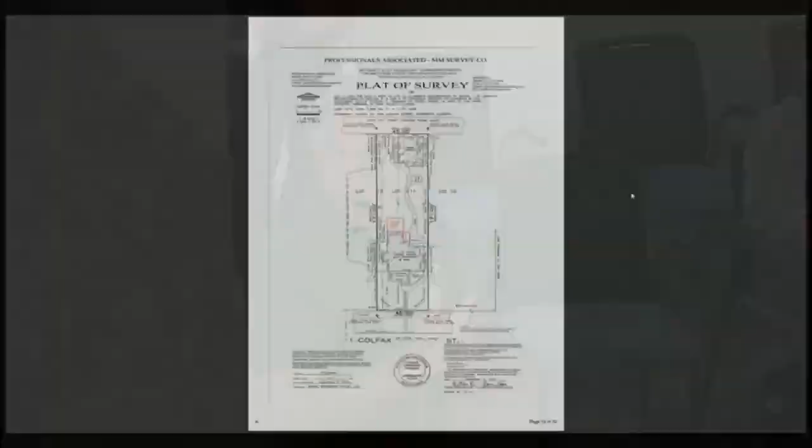Basically, what we're going to end up doing is just add a deck off the back with the screened-in porch, following the same roof line as the existing building itself. And of course, it's not a historic home, but it's a historic district. So there's also some views from different photos we gave to Cade looking into the backyard.

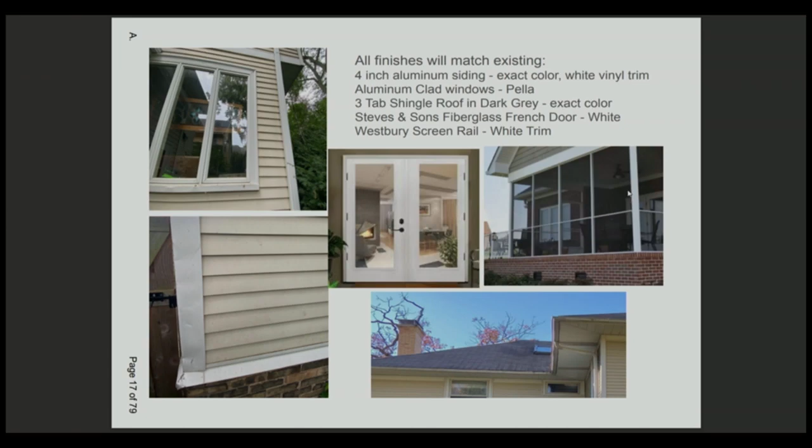But basically, add some examples of what would actually be put in place. We're matching windows, matching siding, etc. Obviously, the architectural plans show how the actual deck and screened-in porch is coming off the back of the house.

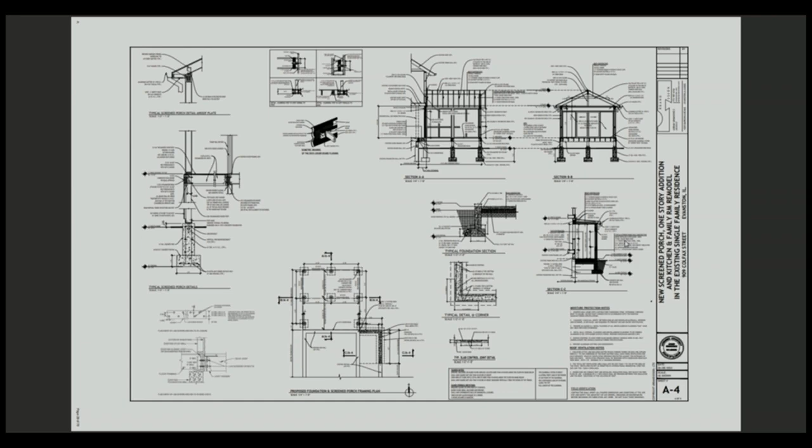Okay, and those are mechanicals. There's a 3D rendering of what it'll actually look like. So the mudroom is getting extended a little bit from current, a couple feet out, and then that's the screened-in porch that we would add onto the back of the house. Is that it? Pretty much.

Okay, thank you. So just for clarification, this building is considered historic because it's a contributor to a historic district. I have a question for you, so we're going to start with questions from commissioners. Could you please address some of the standards that you think are relevant?

Thank you. Well, actually, I probably don't have the exact list of standards, Cade. Is there any specific ones we should be addressing for this one?

So Kate's going to give you the review standards. Standards for construction, and maybe discuss the materials there. Sure, yeah, absolutely.

Well, first with the height, we were hoping some of the photos we had sent over would kind of show that you actually can't really see into this backyard from any direction—not from the front yard, not from the alley, not from the neighbors. There's too many trees involved. And obviously, we'd remove trees just to actually show the 3D rendering.

So as far as the height goes, the roof peak was sitting at about 17 feet tall. The first floor is about 3 feet above ground level, and then it's a standard 8-foot high for the screen around.

I actually went to take a look the other day. As you say, we can't take trees into consideration, but it wasn't very easy to see what was going on because of all the trees, and of course it's summer, so there's a lot of foliage there. The one concern I have is about the relationship to the property on the west.

It's a single-story mudroom, but it is raised, and as far as I can tell from the plans, it does overlook the neighbour's property. So in relation to standards 10 and 11, scale of a structure, particularly standard 10.

This is the standard for review of construction, numbers 10 and 11. In terms of number 10, can you comment on the relationship of the building to the adjacent property to the west?

Absolutely. So, if you were to take it into consideration, their current sight line, their current windows look directly in the same direction that you're talking about. As you come off the back of this building, you are going to be 3 feet up on a fence line, which is only 6 feet high, which is standard fence, of course.

So it should be pretty much on. Are you talking about the upper windows? Yeah, it might be some kind of illusion, but just like the two existing windows, it looks like the flashing is scooting underneath the sills, but in that drawing it's clear the sills are different heights. Oh, I see what you're saying. It does look like they're a little higher here than in the actual drawings. Good eye, yeah, absolutely.

Just for the record, what page are we looking at here? The rendering, page 30? Okay, thank you.

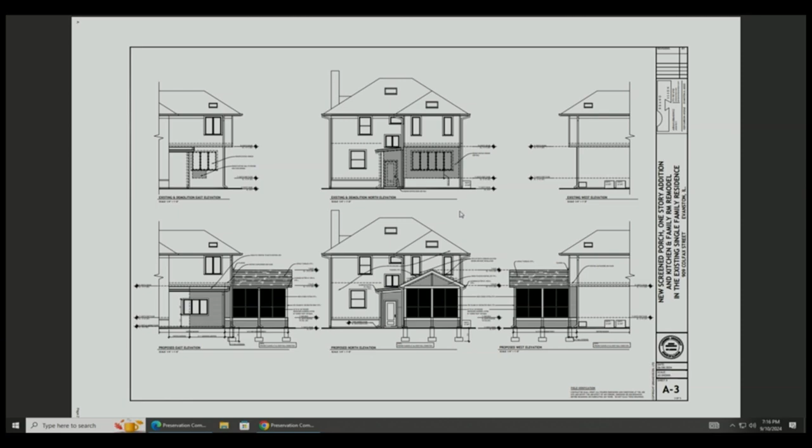Okay, other questions for the applicant? Okay, thank you. Was there anyone wishing to speak on this application? Okay, in that case we will move to deliberation.

I have a question for my fellow commissioners regarding the standard for review of construction number 3, proportion of openings.

I'm just wondering if anyone is concerned about how large those screen panels are versus all the small windows in the back of the house. I don't know whether that's something we need to be concerned about. That's how screen porches are, they need to have lots of screening, but their proportion is very different from everything else.

Go ahead, Stuart. Yeah, I think it's a funny comparison to make, because the windows are cutouts in a surface, whereas the porch is a series of posts with screening infilling between them. So those screen panels aren't really going to read visually as openings in a surface. The question of their proportion relative to a double-hung window in the rest of the house, for me at least, isn't a visual issue. So it doesn't read as relevant to proportion of openings for you guys. Yeah, that's fine with me.

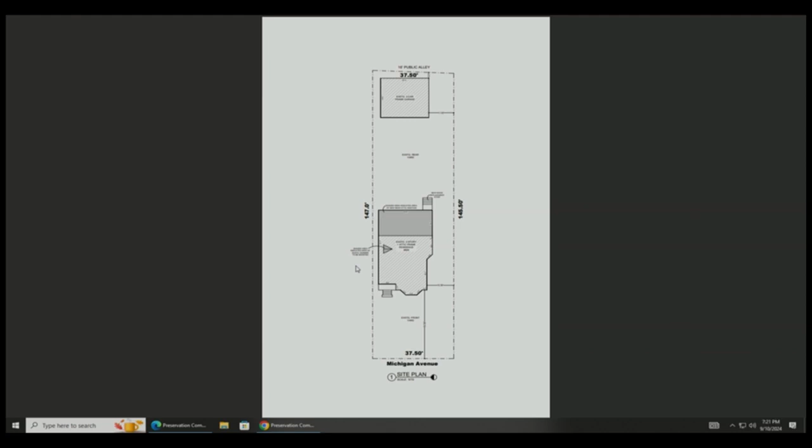As far as height is concerned, we are keeping the existing ridge line, so we're not going any higher than what's existing. We're using the exact same materials. Right now there's vinyl siding, vinyl siding trim, and asphalt shingle roof that we're going to be mimicking. We are going to mimic the same kind of windows—they have muntins that are 3 over 2 on each double hung window.

And then at the rear, it's a little sporadic. Not every window is consistent. This house has a lot of different roof lines, and had an addition off the south side at one point.

So we're at the rear elevation—I think it's the next slide over. Yes, so you can see the existing is on the left, and the proposed is on the right. We're proposing a very large window at the rear addition at the back, using the same windows and same shutters. So that's kind of how we came up with the volume and utilizing the space.

So it's technically an addition, but we're basically building on top of the existing footprint. We're not disturbing any landscaping or any trees, so that's a good thing. And in the end, we will have a nice primary suite for the owners with a bathroom, a closet, and a stair that's to code.

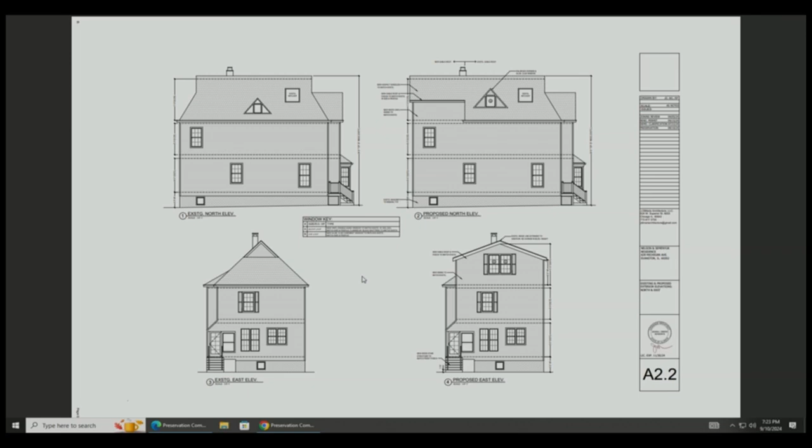And we hope that the front elevation from the street, especially the two dormers, will talk to each other a little bit better than they do now. The existing one is very tiny on that upper left-hand drawing, and the one on the south side will be the same proportion, so there's some continuity between that.

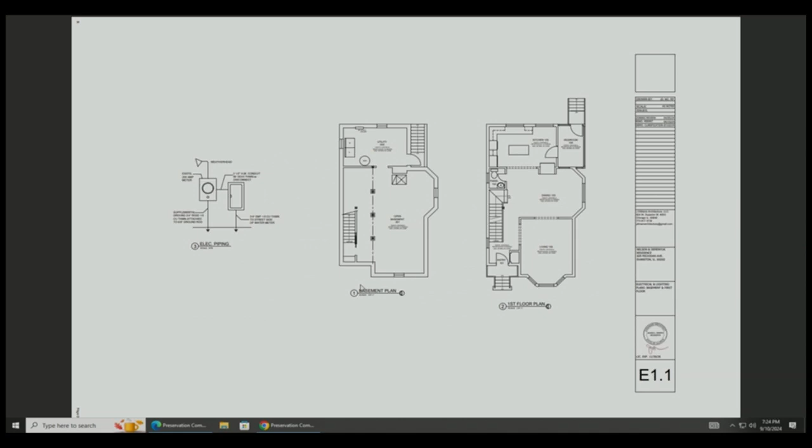We aren't removing any significant architectural details—all the eave lines and heights are going to match. Also, the next image—I don't know if you can go to that... actually the one prior to that, sorry, thanks. So we did, with our 3D program, try to see what we would see from the street, and it's not as visible from the street and the south side alley as it looks like in the elevations.

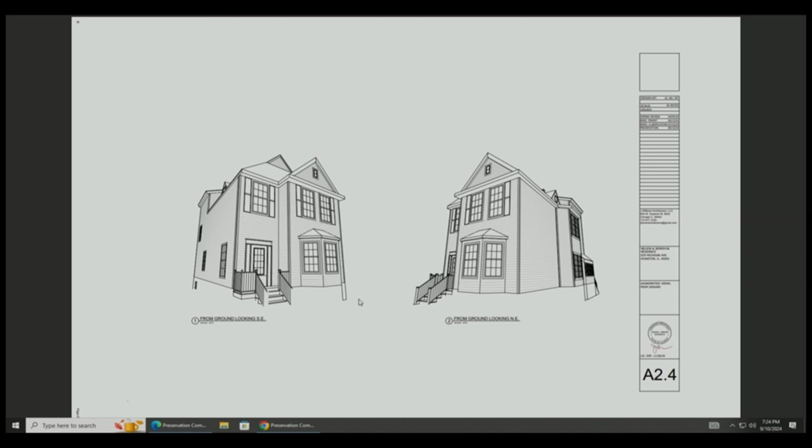The north neighbor is putting an addition off the back right now, and on the south side there's a big apartment building, so because of the zoning, we're R5, we have kind of a mix on that street. Also, the homeowners have two children and are growing their family, and the second floor has three bedrooms and an office, whereas being able to put the primary suite on the attic floor would be good for their property value and good for the longevity of them being able to live in the home for a long period of time.

Yeah, I realized that the addition you're doing is basically in the backyard and barely visible from the street, but all of the drawings you've made show it from the front or the side, and we just get a peek of the way the addition's roof comes together with the existing roof. I think it's a shame that you did not draw a volumetric drawing showing the thing from the back, because the roof pitches are very, very different, and I'm having trouble visualizing what the existing roof and that very shallow gable roof look like when they come together.

I think it might have been useful for you to make that drawing to see what that condition looks like. When we first submitted, we did those axonometric drawings—do you have those? The committee reviewed it and gave us this input. We also sent in a video that moved the volume around, which might be helpful. I don't know if you have access to that. Sorry to put you on the spot.

So while Kate is following up on that, were there any other questions?

Go ahead. Did you consider any other kinds of roof lines? I mean, obviously you're trying to maximize square footage up there, and I've had attics like this where you're like, what do we do with this space, we thought we could get more up there. But did you consider anything else, or was this it?

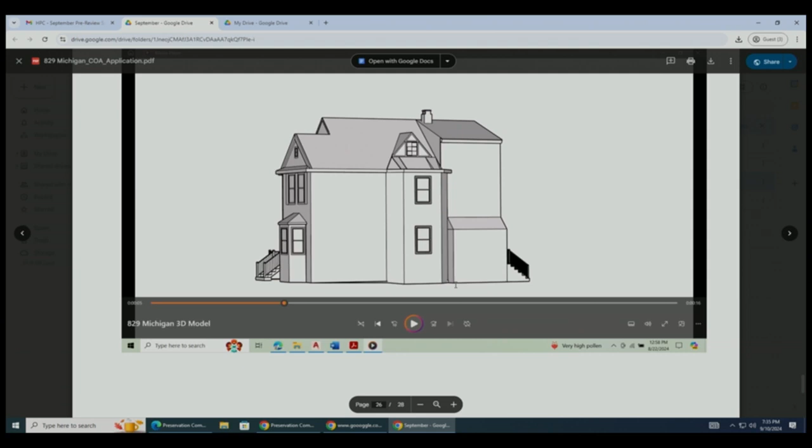I'm just curious, and maybe you answered this when Josh asked a similar question, but it seems to me that if you had shed dormers in the middle of the plan, I wouldn't have this concern with this kind of tower appearance at the back. Was it a concern for getting rid of existing dormers, or what was it?

Yeah, because the existing dormers, especially the one to the south, is really charming. It's basically a bay window that comes all the way up, and then there's a dormer on top of it. From the inside view of the bedroom, it's really a charming little nook. You really can't get in there, but it adds to the charm of the attic. So, yeah, in my estimation, it seemed that would be a much bigger ask to do that, and kind of a standard solution in a way.

That's our thought process. So I have a question, because this back addition, is this parallel to the 3-flat that's next to it? There's the porch, there's kind of a 3-story porch. Yes, that also has that large vertical element. Is that kind of in the same plane? Exactly, they're basically in the same plane, yes.

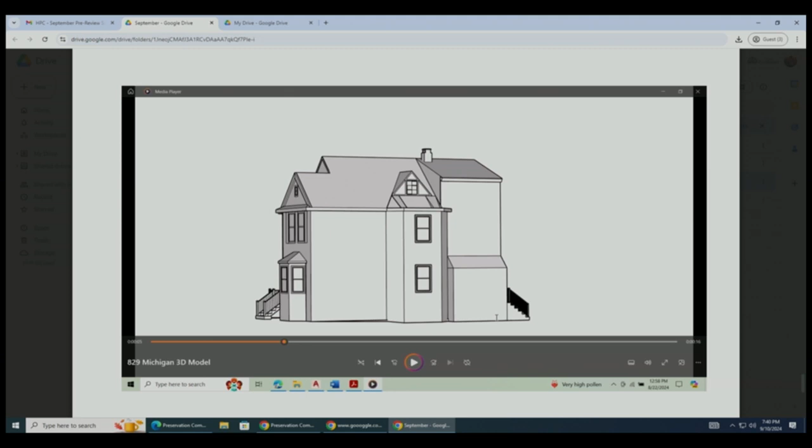The other possibility is, if you look at the front of the house, what you've got is a kind of echeloning situation where you have a lower gable coming forward, a higher gable, and I think for me the problematical thing is the back. Do you have a volumetric shot that shows it from the back?

Yeah, that one. I think the problematical thing is that, as Tom said, it reads as a tower, but it's really kind of stubby, and the pitch of the roof is so low compared to the rest of the house. I don't know whether the ridge line is at the maximum allowable or not, but it sure would be nice if you raised that ridge line and then had a lower gable in front, another gable, and yet another gable behind that.

From a construction point of view, I'm assuming the rafter ties are going where the head of the window is, and if you had a steeper roof there, which would allow you to set rafter ties at a third point, you'd pick up a little bit of ceiling height. You'd pick up, I think, a better relationship to the massing and the roof angles of the house by doing that. But again, I don't know whether the ridge for the house is maxed out in terms of what you're allowed.

I wanted to just, this is our deliberation, sorry. No, it's okay, if we have questions for you, we'll ask. I just wanted to say, this sounds really loud to me. Is it all of a sudden, right?

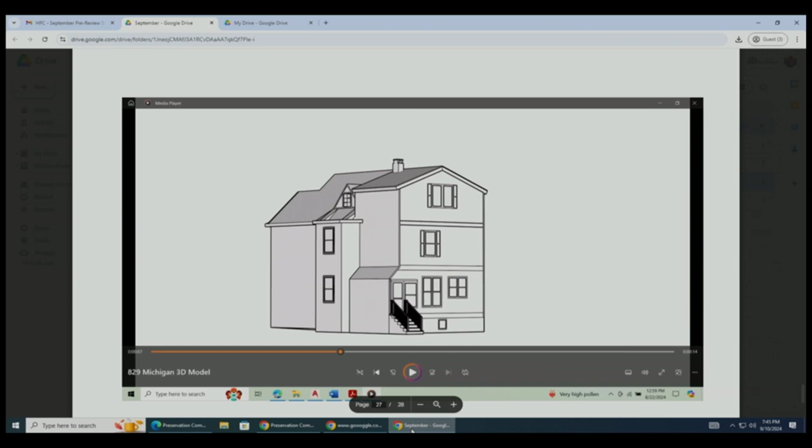I think, unless I'm misreading the drawings, I just want to clarify that I think these volumetric studies are a little simplified in terms of the pattern of fenestration compared to the elevation drawings. So what's the equivalent in our packet here? Because it looks like page 51. Is that what it's telling me? I can't read that far. 51, let's look — Sheet A2.1.

So those are the elevations. Oh, I see. Yeah, so there are windows there. There are 4 on the first floor and 1 on the second floor. Okay, so now I understand. The other was a more simplified axon, and what we have in our packet is more detailed. I think it was just there to help us get a sense of the massing from the back.

Other questions about applying the standards? Thomas, did you have a standard? Yeah, so I was — go ahead. This is kind of, I think, what Stuart and I channel as our intuition, which is just codified, so almost every time we can find a rule that's behind it. The one I probably should have started with was the proportion of facades.

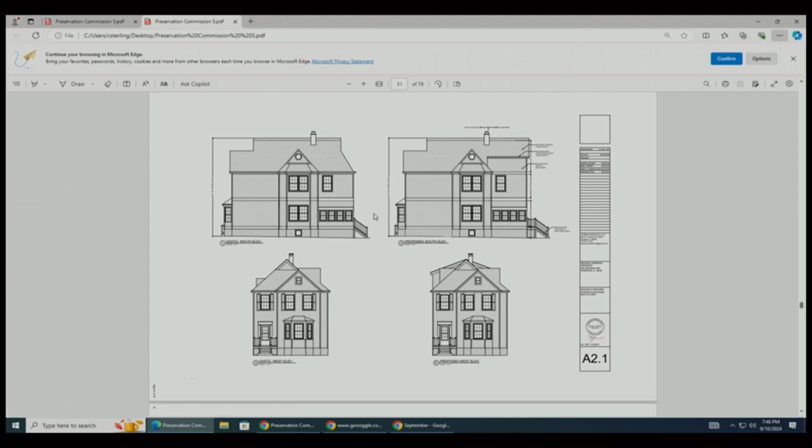So that's standard for review of construction number 2. Yes, right. So it becomes an extremely vertical rear facade that is very different, fairly different, from most of the other facades.

So the relationship of the width to the height of the facade shall be visually compatible. We're not necessarily talking about it being exactly the same, just compatible. So you think that breaking it up with some trim of some sort would satisfy the proportion of facades standard? Yeah, I think it would go a long way to helping with that. Okay, other thoughts about that?

I just wanted to say the other standard is standard 8 of construction, which talks about roof shapes, and that the roof shape of a structure, including roof mounted equipment, should be visually compatible with the structures to which it is visually related. So I guess this roof shape of the addition relative to the existing roof shape is that cake top reference that Tom was saying. I think that it is awkward when you look at it. It looks a little bit awkward to me.

So it doesn't look visually compatible? It does not look visually compatible. Does somebody want to comment? Yeah, I agree. Actually, when Stuart first brought this up, I sort of sighed and was like, oh my gosh, that makes a lot of sense. I hadn't thought of it that way. I thought your suggestion, Stuart, was really, really good. And I think that we do have a relevant standard to back that up.

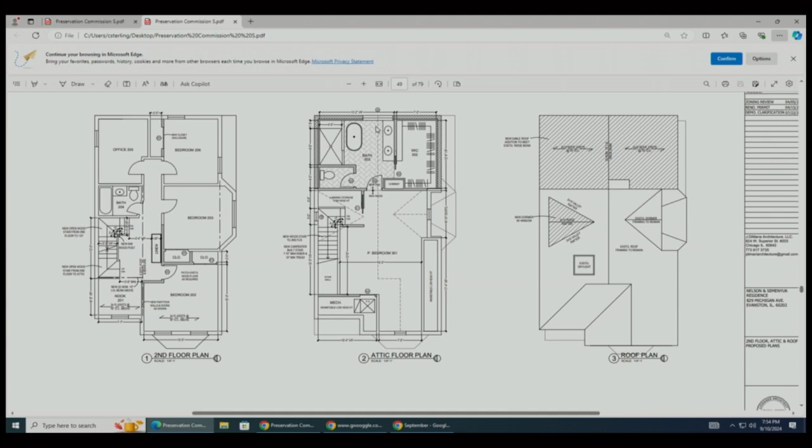Okay, so the east end of the addition - can we pull that up? That east wall, and we're all used to north being up, so we're not saying north - the east wall in the middle, in the bathroom plan, if that wall came west by a foot, by 18 inches, then we would see the gable. The gable would get expressed, instead of the hip. Oh, the new gable, got it. We need a whiteboard.

Yeah, you're talking about stepping it back a little bit so that what is currently there remains. Right here, that's what you're saying. Yeah, if it just stepped back, you basically add a gable. Tom wants to bring the existing eave line around the back of the house. I know that means structurally you have to pick up the wall above, but I don't think that's a big deal.

Now that I'm looking at the back of this, the takeaway is there are a few things you could do, and it's up to you what you come back to us with. I wanted to ask about the composition of the windows on that back wall. I understand the paired windows under the gable on the third floor, one in the closet, one in the bathroom, as a feature to center them and emphasize the center line of the gable - I'm fine with that. Compositionally, that's what houses like this would have done.

We're sort of taking the best existing condition on the second floor - yeah, what was existing, because some windows have shutters, some don't, some are vinyl, some are wood. But the expectation is compatible, sure, it doesn't have to be exact.

Sure, so like what Commissioner Cohen was saying, if we added a window on the second floor, it would make that top addition potentially look less heavy. It would be more cohesive, potentially.

I think that's existing. So I don't know whether we want to, may I ask this? I know this is a process and we've been going at this a while. What do next steps look like?

We need to continue with our deliberation, if nobody else has any questions for her. We'll continue with our deliberations, and then figure out whether we're going to approve it, or approve it with conditions or something like that. That's the next step. This isn't necessarily a while, maybe it's a while for you guys, but we've deliberated longer for other projects.

Thomas, could you just go back, because I think you were finishing with your explanation of what your thought is. Yeah, so I think I can wrap up where I'm coming from. In the interest of wrapping up, debate starts in a minute.

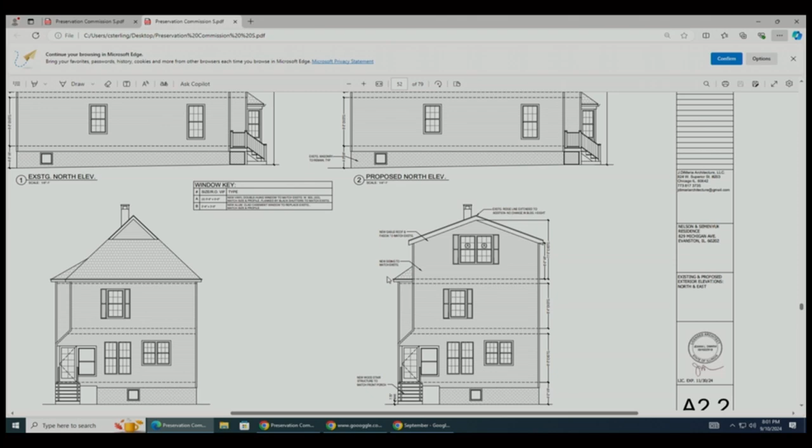Lisa, did you have a comment? Go ahead, she's just sketching out the potential of the different slopes of the roof, and how it would look at the front. If we have the existing, it's more of a flat slope, but if we made it more of a steep pitch, you wouldn't see as much of the addition from the front.

You were talking about actually leaving the pitch more or less as it is, but turning them into dormers effectively. Sorry, for me this is really at the back of the house - from the front, we're not seeing it much. So radically changing the volumes, where I totally see where you're coming from.

I don't think it's necessary for me because it's at the back and you're not going to really see that from the front. It's just that from the back, it just seems extremely vertical. The 4/12 or 3/12 or whatever that is just doesn't have anything to do with the house. So just give the 12/12 tacked on to that back east wall so that it at least looks like, yeah.

One solution is, we need to make sure I explain. One thing we could do is lower the height of the windows and take that eave line and bring it across, and then you could read the triangle. We can almost mimic a bigger version of what the front facade looks like, and we wouldn't have to change the pitch or the floor plan or anything.

I feel like I need to see a different version of this. I love all the ideas, but we all want to see it again. There's like a couple ideas floating, which all seem like reasonable ideas, but I feel like they need to be drawn up and reviewed.

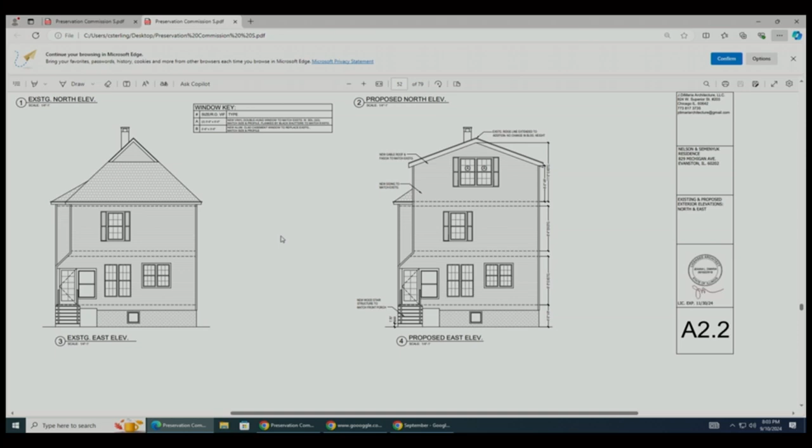Can I say something just by way of clarification? Because I've been sitting here trying to imagine what Tom is suggesting, and it finally occurred to me that by bringing that roof across, setting that thing back, the low pitch reads entirely differently. It goes back to his suggestion that you do something which reads as if it was a shed dormer to a principal roof.

We've made a lot of suggestions. I think the way I feel is that how you do this is up to you as the designer, and that we should give you the opportunity to come back. I don't know whether all the commissioners think it's something that could be done as an administrative review with a few of the commissioners involved, or whether you want to make another presentation to the whole commission.

That's what I was going to ask next. So does anyone want to feel like you can vote on it now, or would you like to give them an opportunity to make these revisions?

Well, in the past, we've also said administrative review with concerned commissioners having a chance to weigh in. I'm always going to be concerned about a month is nothing for us, but it's a lot for these folks. So if we could help them by meeting out of these chambers to help them move along, I would.

All right, then how does, if you wouldn't mind, how does an administrative review sound? Would you all feel comfortable voting on it, but with administrative review? I would like to see it.

I personally wouldn't want to do administrative review because there were so many ideas. I'm not sure what it's going to look like. I really don't know. They were all different roof heights, pushing it back, so many things across. I can't say that I really have a sense for what the final product is going to look like anymore.

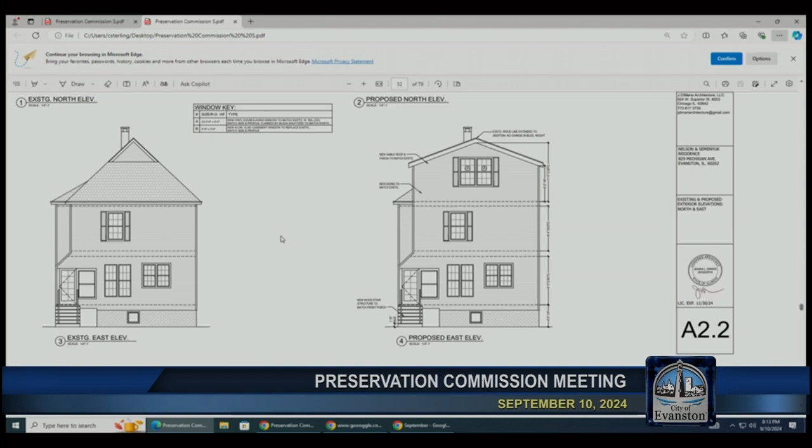There's no hard and fast rules for this. I mean, technically, if you're kicking it back for administrative review, I'm the one that's making the decision. That's not how it's worked in the past, because it's been a collective decision.

Well, that's interesting. So really, we're not making the decision? Well, you're the ones that are saying. That kind of makes me wonder—for me, then I would want to see it come back to the committee, personally. Not that, just because I thought administrative review was us truly, as commissioners, reviewing it, but it sounds like—

You're not letting me finish what I was going to say. Okay, go ahead. So I'm saying the technical rule: there are commission reviews and administrative reviews. So when you say you're deferring something to me, I am technically the person signing off on that. Now, how this has happened in practice is that we convene up to three commissioners who find standards problematic, and they're saying they would not vote for this unless these things are addressed.

We've done it in a couple different ways. More frequently, we would sit down together with the applicant and the architect, and review what they're proposing—does it address the concerns you had or not? We would say, yes, it does, and then you'd sign off on it. Now, I've never had it where we've sat down in the room and two of the three are saying yeah, it does, and one person says no, it doesn't.

But I think if that did happen, it would either be an opportunity for them to try to come to some kind of mutually agreeable solution, or I would probably just say that two out of the three said it was addressed, and that's a democratic thing to do to move forward.